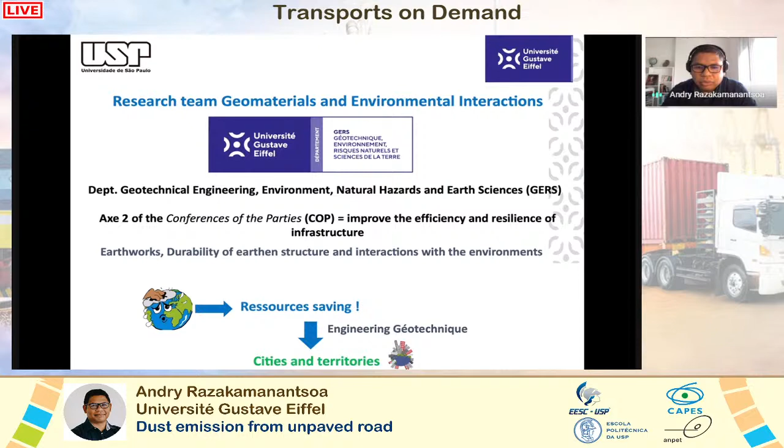So our main topics are around earthworks, durability of earthen structures, and the interaction with the environment. In the context of global warming, the main question that we try to solve is about resource saving by using the knowledge in engineering geotechnics around the application, which is cities and territories.

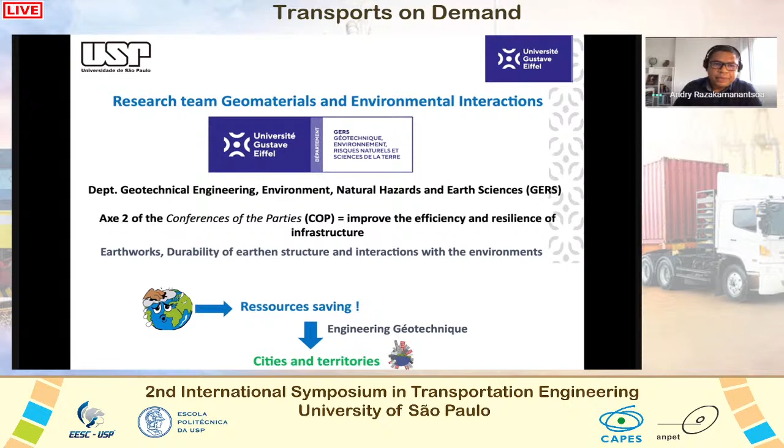The main topics of research of our laboratory are focused on interactions in geomaterials, where we try to develop new binders and to reuse materials, mineral and organic. With these aspects, we use porous media and coupled hydromechanical and chemical mechanisms as methods of study. About interactions of geomaterials with the environment, we are working mainly on geomaterials submitted to hydromechanical stress, and also interaction with the atmosphere. For that, we use multiphysics coupling, solid mechanics, and fluid mechanics.

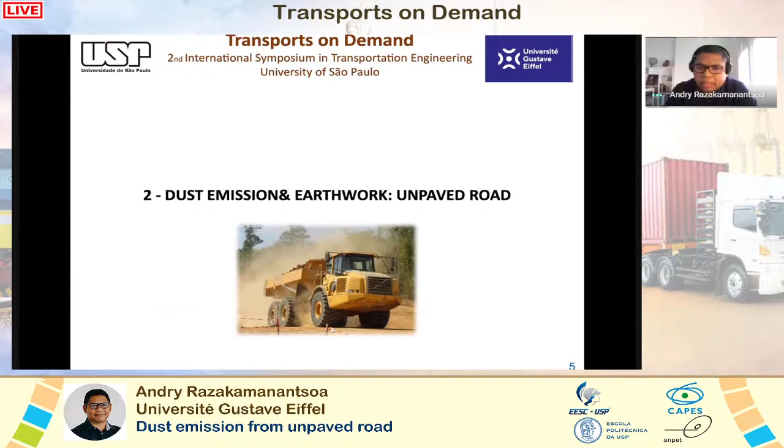Our strategy is that the studies are performed using a pluridisciplinary and multi-scale approach from molecular to field scale. And let's go back to the topic. I want to talk with you today about a part of a study that we have performed on the problematics related to dust emission. The first part of the presentation is related to the geotechnical aspects of dust emission and the link with the unpaved road.

The main context is about the need in the field. If we talk about earthwork applications, the professional activities require the use of an important volume of water for different parts of the activities. But the activity which uses the most water is dedicated to dust inhibition. Why dust inhibition? Because it can cause problems, risks to the security and safety of workers during the activities.

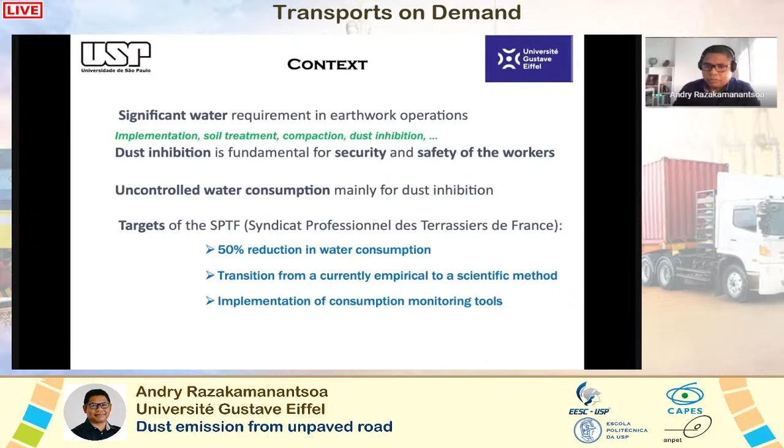But nowadays, the quantity of water that they use in the field is not controlled, and the target is to try to reduce water consumption and to use a scientific approach to develop different tools that can be provided to the profession. Many actions have been carried out by professionals in earthworks, and they are good and interesting, but not sufficient to reduce water consumption.

To give an example, it is 1 liter per cubic meter of moved soil. If we consider that we have 60 cubic meters per day for a current earthworks activity, then you can imagine the quantity of water that they consume. But this is an example.

But for now, there is no tool to help the professional in earthwork activities to control the use of water. So the problem is about dust inhibition. So I would like to talk a little bit about the state of the art related to dust, because if we take into account the geotechnical definition, we don't have dust, but we can consider fine particles less than 80 micrometers that can be collected from the surface of soil.

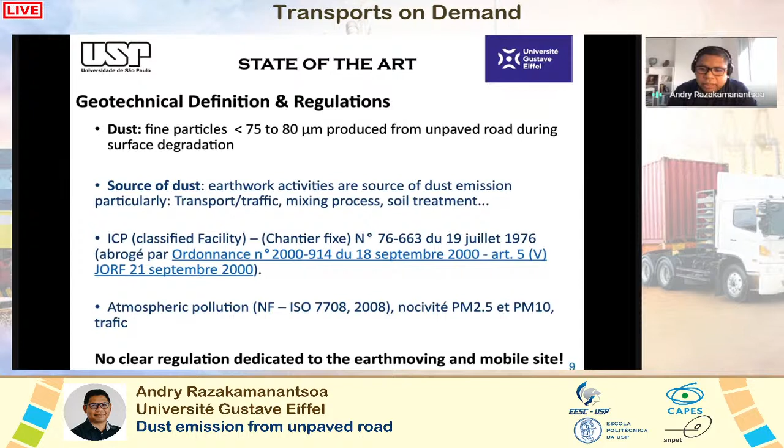So if we can consider that this is dust, this can be produced during transport, traffic, mixing process, or soil treatment. In terms of regulation, in France, many regulations are dedicated to sites like quarries, but it's not very clear for earth moving and mobile sites in terms of exposure.

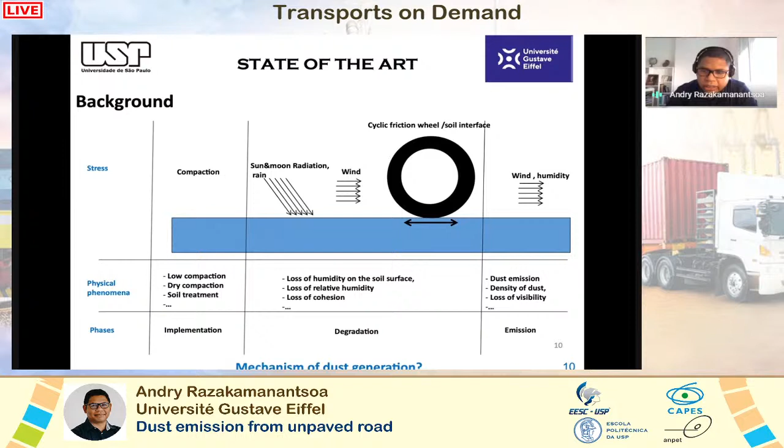If I make a kind of background about dust emission and try to identify the main sources of dust production, we can see that we can have dust from compaction, or during a cycle of traffic, or also due to environmental conditions like wind and things related to that. But from the current knowledge, the mechanism of dust generation is not well clarified.

Okay, how to inhibit dust emission? For now, there are many techniques, but we can summarize them in 3 points: mechanical stabilization, the second one is the use of additives like binder or other chemicals, and the third one is the use of water. But the use of binder is not recommended because it's not environmentally friendly.

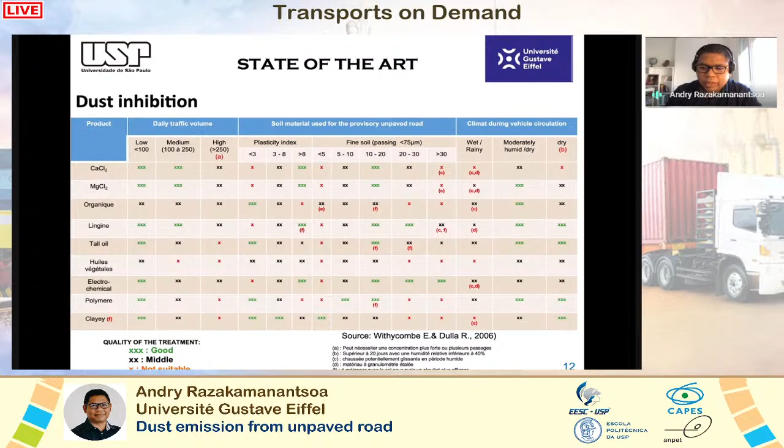So the cheaper one is water, but regarding the target to reduce water consumption and protect water resources, it becomes a problem. So let's talk about the scientific gap. Many scientific and technological gaps can be cited, but regarding dust emission, we have selected 3 points.

The first one is regarding the reproduction of the mechanical stress governing dust generation at laboratory scale. After that, what about the dust initiation conditions subjected to environmental parameters? And the last one is the consideration of dust emission, which will be the topic of Michael later.

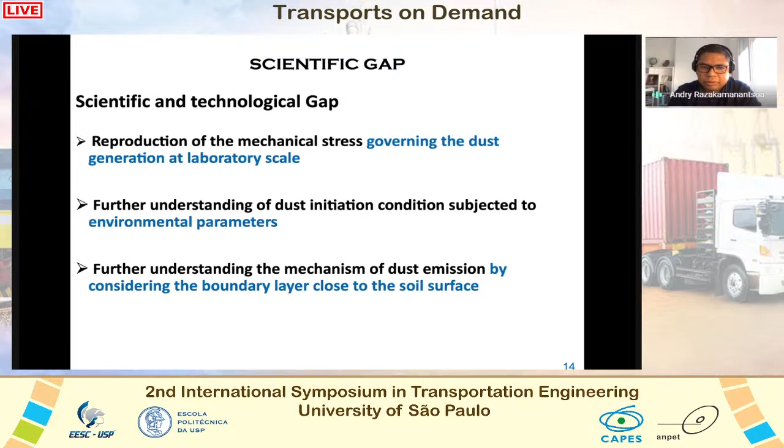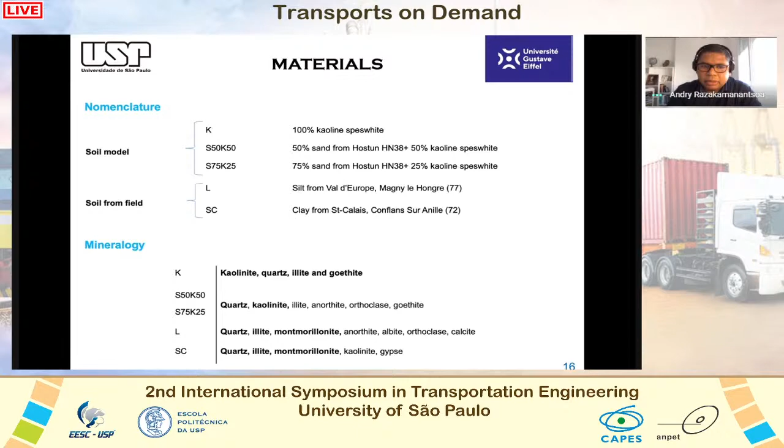To perform this study, we have selected different types of materials. We have a model soil, and we also have soil from the field. We have the mineralogy. We have selected these materials to have a fine soil like a clay, but it's not swelling. These are the soil classifications, considering the GTR classification in France or ASTM. So we have a fine soil with low plasticity, a soil with a high potential of dust emission.

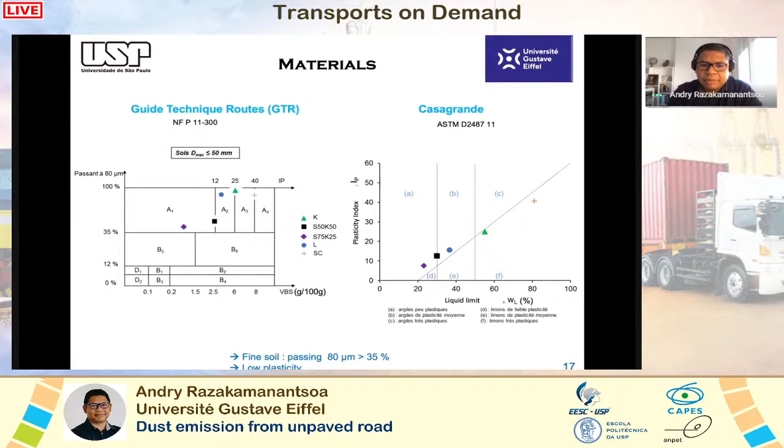The first point that we try to highlight is the source of dust generation. For that, we want to investigate a little bit the influence of stress tensor rotation provided by the roller compactor that we can encounter in the field. From that, we will see how it is possible to apply and develop this kind of compaction at laboratory scale, and to compare it with the conventional one that we used to have in the lab.

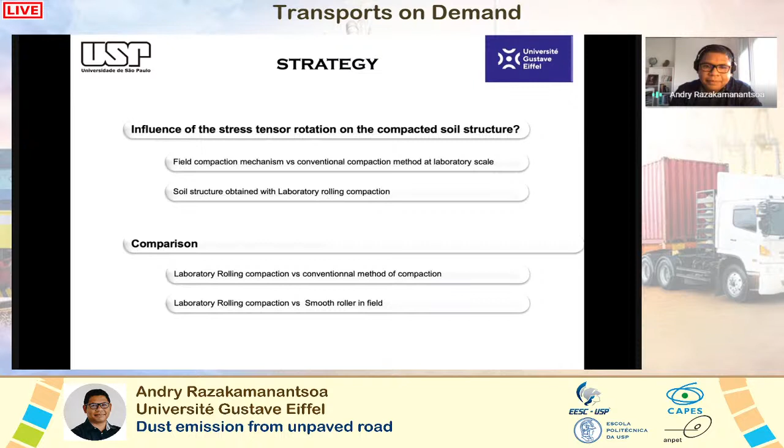As I said, when you consider a smooth roller compactor, for example, it applies a stress tensor rotation during compaction, and this enhances the settlement of the soil, and you have compaction at the end. This stress tensor rotation is not easy to perform in the lab, because the conventional laboratory compaction that you have actually is either dynamic or static uniaxial compression.

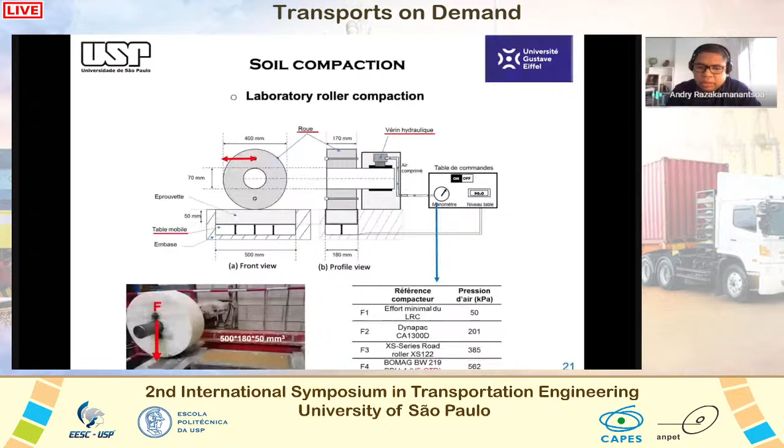So the first question is how to reproduce this method, in order to understand further the soil structure provided by this kind of compaction. So we developed a new method for our application, and we applied different levels of effort which correspond to the standard smooth roller that we can encounter in the field.

As a result, regarding the soil structure, the laboratory rolling compactor provides a similar level of dry unit weight as the standard Proctor, but the difference occurs in terms of pore size distribution: when we increase the compaction effort, the roller compaction decreases the macropore size around 10 micrometers. And obviously, the volume of mercury that can be absorbed decreases.

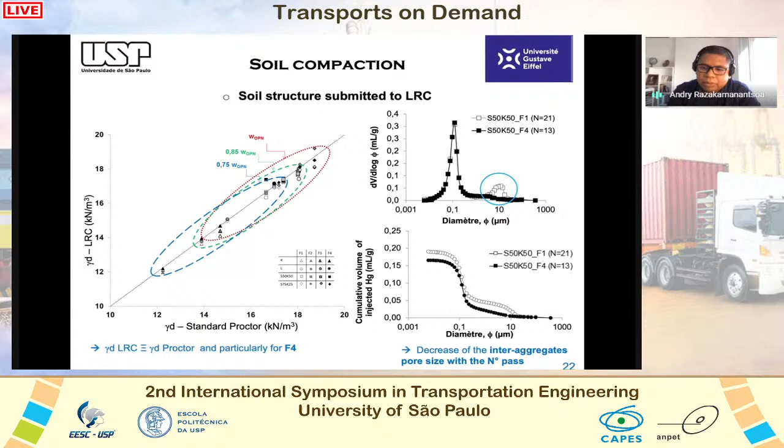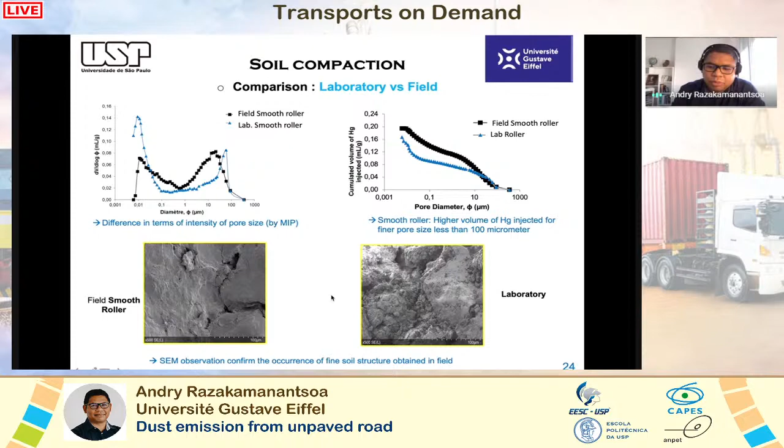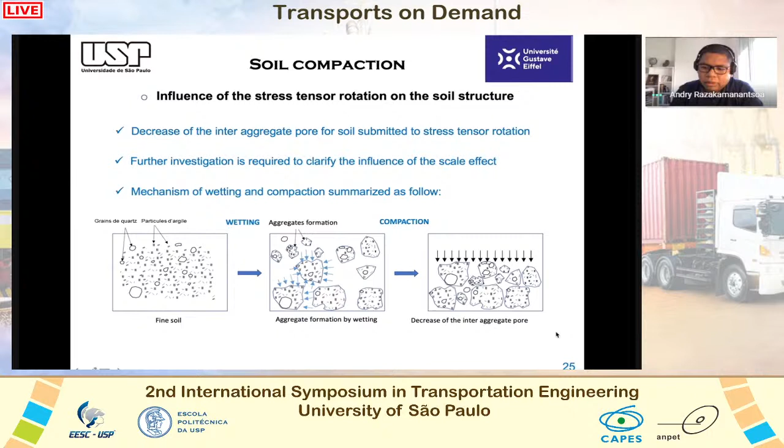If we summarize what we have obtained as information about the compaction, all types of compaction reduce interaggregate pores of the soil submitted to stress tensor rotation. And another important information is that the aggregate formation is obtained during wetting, and compaction allows only to decrease the macropore size without touching the micropore size, which is inside the aggregate.

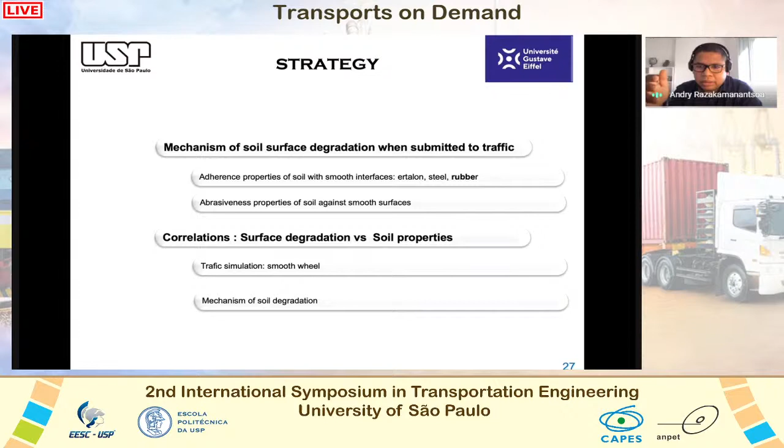The next step: since we understand more about the compaction, let's talk about the interaction between the compacted soil and the wheel during a traffic simulation. We will talk a little bit about the adherence and the abrasiveness properties of soil against different types of interfaces, mainly rubber, because when we talk about traffic, the soil is in permanent contact with rubber during the traffic cycle. And after, we will try to see if we can make a correlation between surface degradation and soil properties.

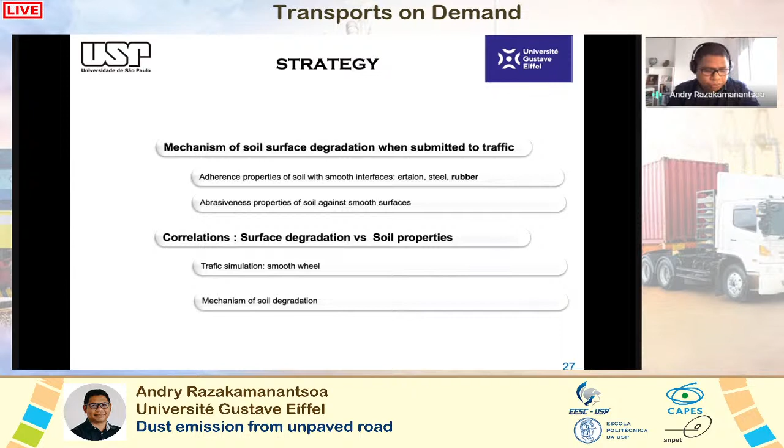About the adherence and the abrasiveness: for that, we did a unidirectional shear box test, and we changed the interfaces. The first model is to use soil and soil interfaces, to obviously have a cohesion and a friction angle. After, we changed the interface and put rubber, steel, and Ertalon to have different types of interfaces.

In terms of adherence, you have the ratio between the cohesion with interfaces and the cohesion with soil. If you have a ratio of more than 1, that means that the adherence is more important. As you see, with this type of soil, we have an adherence which is higher. Looking at the type of soil, the more we increase the sand content, the higher the adherence. It's obvious.

And in terms of abrasiveness, what you see is that all of the soils have an abrasiveness level which is close to 1. That means that all configurations tested can be degraded more or less in contact with rubber.

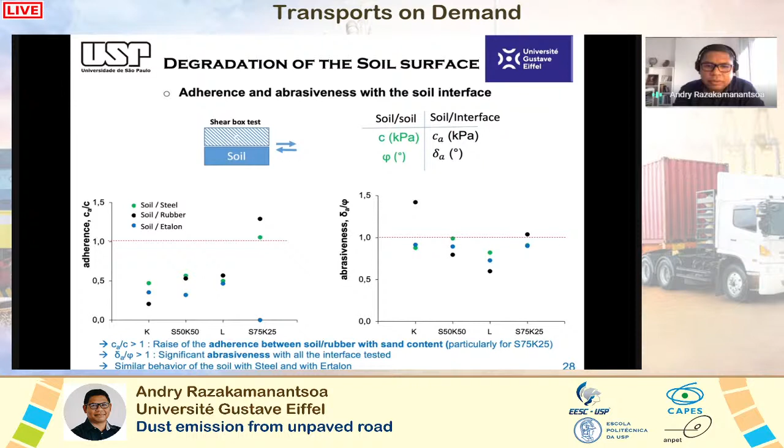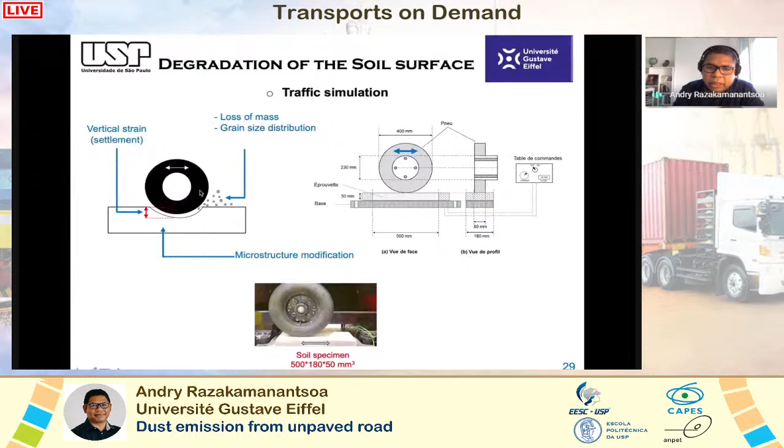After that, we tried to simulate cycles of traffic at laboratory scale. We compacted parallelepipedic specimens and applied different cycles with a smooth wheel. We measured settlement, collected the particles resulting from traffic, and did grain size distribution and SEM observation.

From SEM observation, the grains collected after a cycle of traffic are mainly composed of aggregates. And if we apply different series of traffic cycles, we observe that at the beginning we have a very important aggregate size, and this size decreases as the number of traffic cycles increases. That means that the abrasion between the rubber of the wheel and the soil increases with the number of cycles. We developed for that a degradation index.

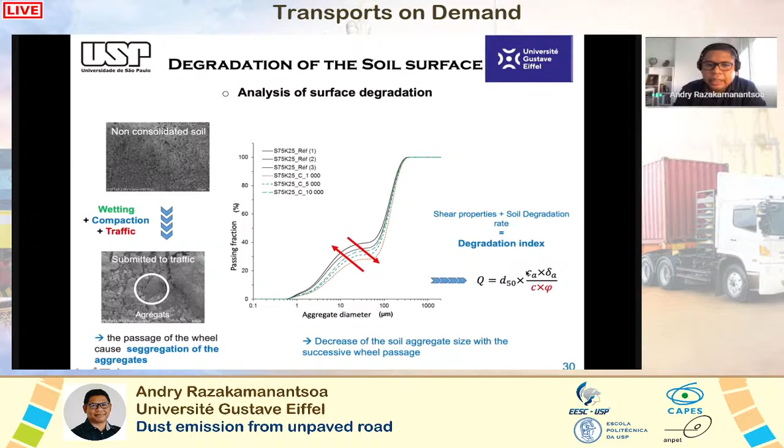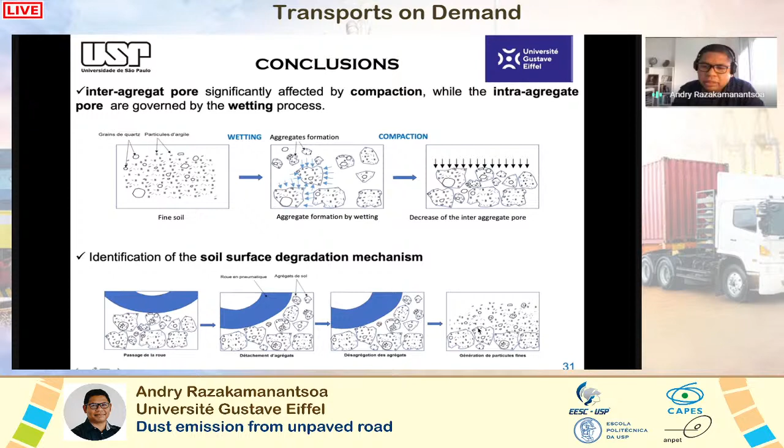As a conclusion, regarding the compaction, wetting allowed to create the aggregates, and compaction allowed to diminish the space between aggregates without touching the micropores inside the aggregate. Regarding the soil surface degradation mechanism, at the beginning you segregate the surface of the soil, you take out the aggregates, and with time the aggregate size decreases until we have fine particles. So this is the first step of the study.

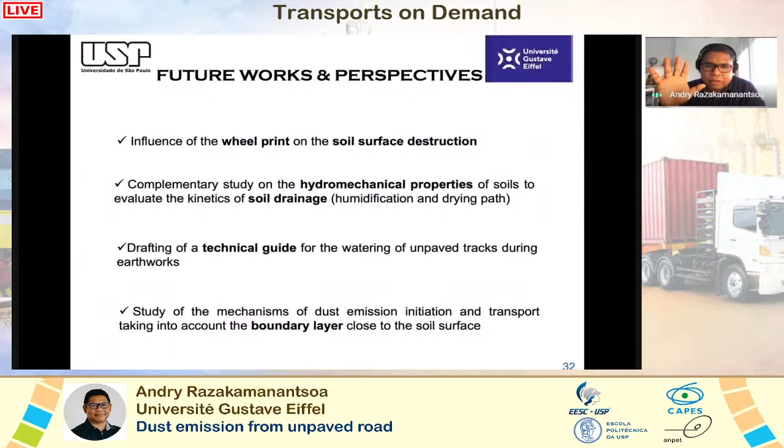What we have concluded: first, we have to investigate more the influence of the wheel print on soil surface destruction, and then take into account hydromechanical properties related to soil drainage during wetting and drying paths. And from now, we are also trying to draft a technical guide regarding the implementation and the soil degradation to help professionals in terms of water saving.

So in the overall view, the following steps of the study are to try to take into account the problem of health, which is linked to PM, particulate matter emission, and to try to prevent some health problems related to dust emission.

So this project has been running since 2012 until now. We have had 2 PhD students and several masters. We have international patents and scientific papers and a guide in preparation.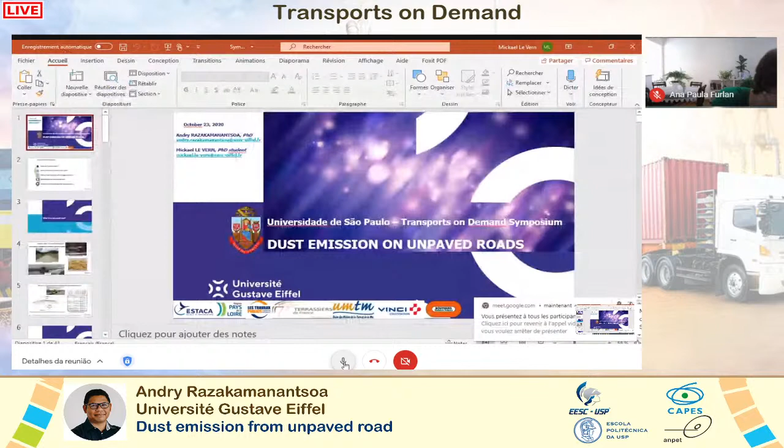So hi everybody, I'm Mickael Le Vern. I am a PhD student working with Andry Razakamanantsoa, and I will present to you the atmosphere and soil interface, the interaction. First of all, I will broaden the topic of unpaved roads, and after that, I will focus on our recent research undertaken in our lab on the problem. So I will speak about dust, and I will give an overview of unpaved roads in the world.

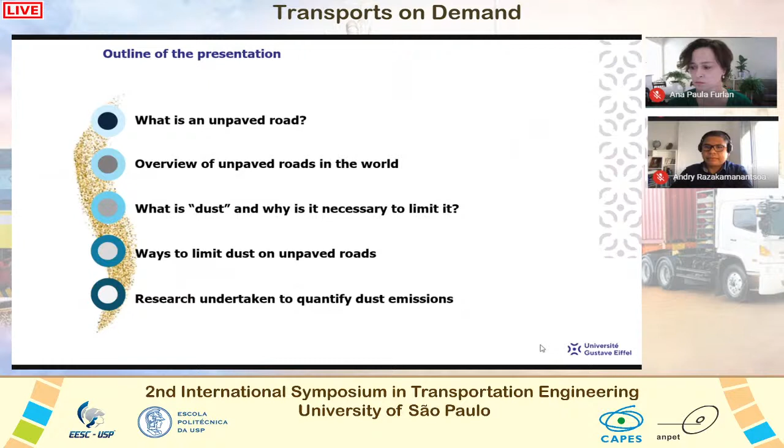So what is an unpaved road? Andry spoke about that. An unpaved road is a road with no surface coating layer. There is no asphalt, no bituminous material on the surface. So the vehicles circulate on the aggregates. These roads are not paved for economic or practical reasons. For economics, for example, low volume roads: there are not enough vehicles circulating on the surface to make it viable to put a bituminous layer on the surface. And for practical reasons, for example, in mines or in construction sites, because these roads are temporary. So we do not put asphalt layers on temporary roads.

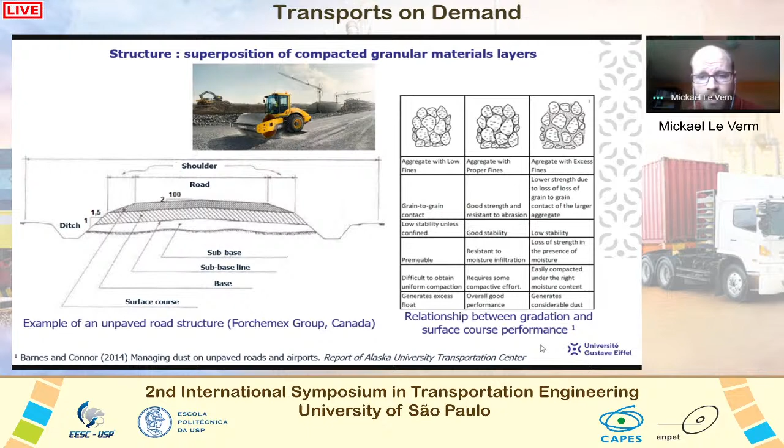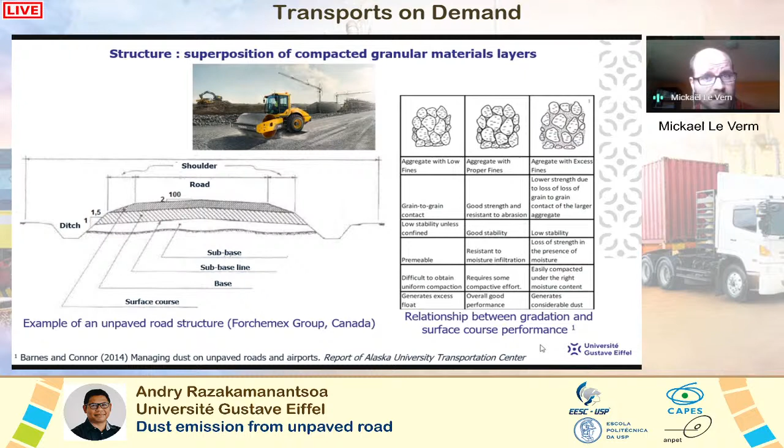So what is an unpaved road? It's a superposition of compacted granular material layers, and vehicles circulate on the surface course. The surface course is made of a mix of aggregates and fine particles. If you have too many aggregates, you cannot compact the road, so it's not good. If you have too many fines, you have a problem of stability and too much dust generated. So you have to have a good gradation of the surface course.

So here I present the 6 countries around the world with the largest road networks. First of all, the US: 37% of the roads in the US are unpaved. It's the same amount in India. In Brazil, in your country, 89% of the roads are unpaved. It's a very large amount. It's a very important topic in Brazil. And in Canada, 60% of the roads are unpaved.

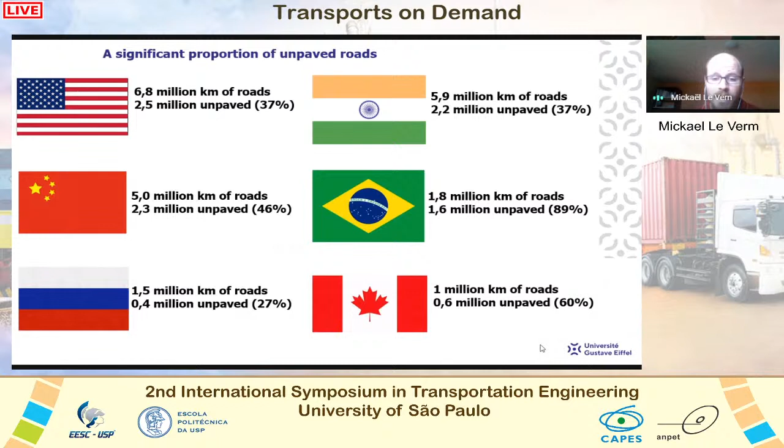So these roads generate a lot of dust. So what is dust and why is it necessary to limit it? Dust particles are the fine solid particles remaining suspended in the atmosphere that can be transported by the wind. Unpaved road emissions are in the range of fugitive dust, which are coarse particles. Coarse particles are between 2.5 and 10 micrometers. We can see on the right the comparison of the size of the particle with a human hair. A human hair is almost 50 to 70 micrometers in diameter.

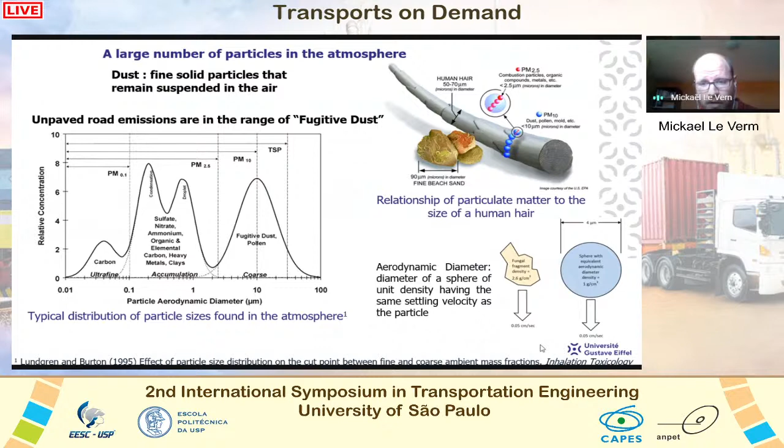And we can see the particle of 10 micrometers, the blue one, and the 2.5 micrometer, the red one, very fine particles. And we are taking into account not the real diameter of the particle, but the aerodynamic diameter. You can see here a definition. Aerodynamic diameter is the diameter of a sphere of unit density having the same settling velocity as the particle. So that's what, in the literature, we are considering.

So where do suspended particles come from? They come from many, many areas, but particularly combustion: the combustion of wood, the combustion of oil in engines, exhaust of diesel engines, and also dust on the roads, on unpaved roads, and dust on construction areas, which are mainly, you can see here, coarse particles, between 2.5 and 10 micrometers or above 10 micrometers.

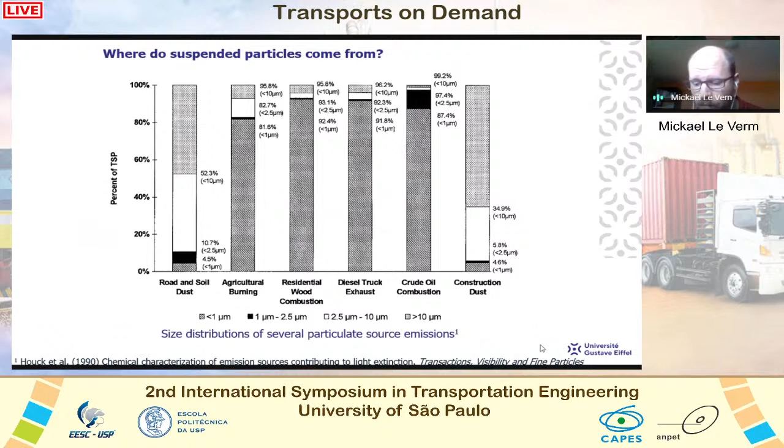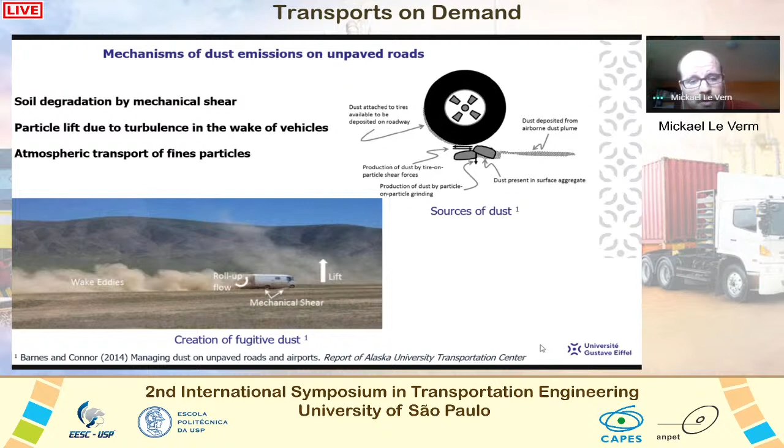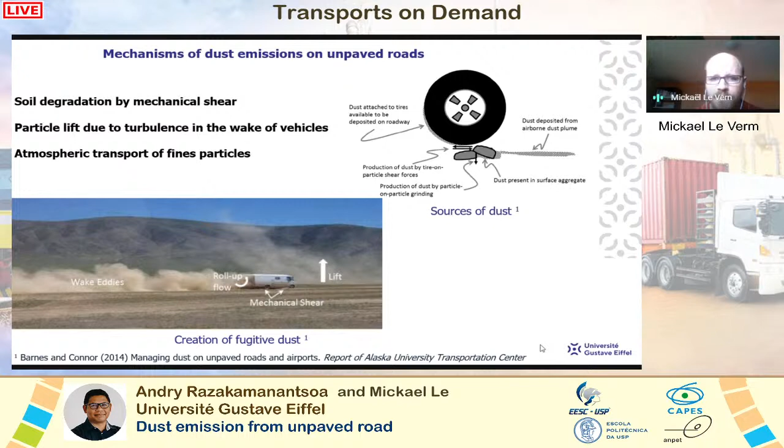And what are the mechanisms of dust emission on unpaved roads? Andry spoke about it. It's soil degradation by mechanical shear at the tire-surface interface. The particles are lifted due to the mechanical shear, but also due to the turbulence in the wake of vehicles, the eddies generated by the vehicles circulating on the road. And particles are transported by atmospheric turbulence, by the wind.

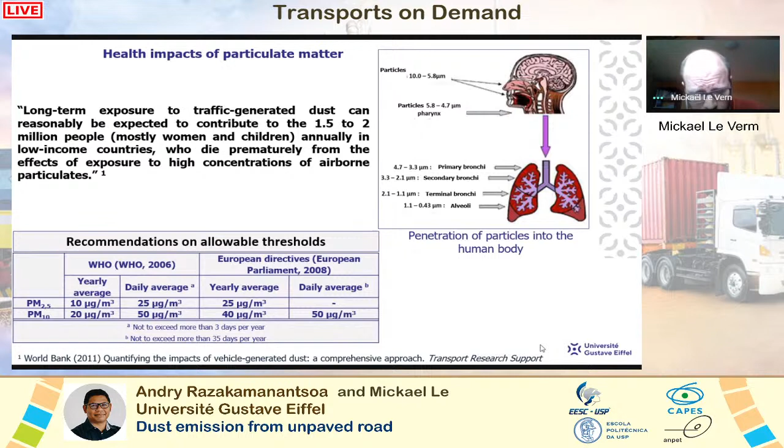So here you can see a quotation from a report of the World Bank in 2011 about the dust emission of unpaved roads, saying that between 1.5 and 2 million people die prematurely in the world every year because of high concentrations of airborne particulates. So it's very important. And that's why, you can see in the table, the World Health Organization and some parliaments, for example for us in France, the European Parliament, have some recommendations of allowable thresholds of particles in the atmosphere. You can see it's around tens of micrograms per cubic meter of particles not to be exceeded in the atmosphere.

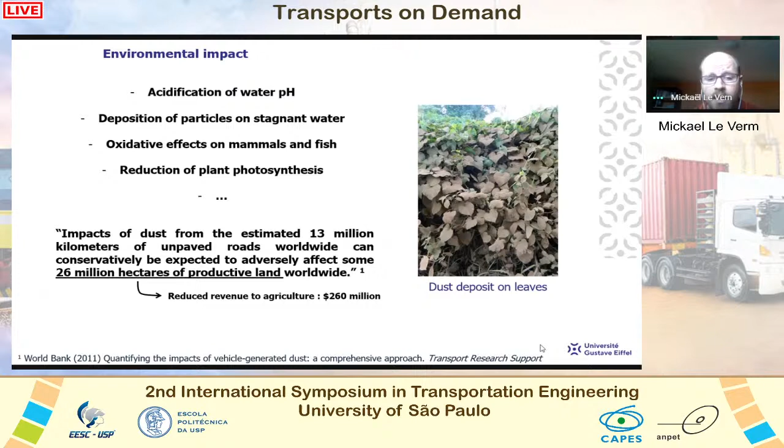Particulate matter also has environmental impacts. Dust, when it deposits, can deposit on leaves and reduce plant photosynthesis. It's a problem for agriculture. Here again, a quotation: 26 million hectares of productive lands worldwide are affected by particulate emission, and it reduces the revenue of agriculture, so it's a problem.

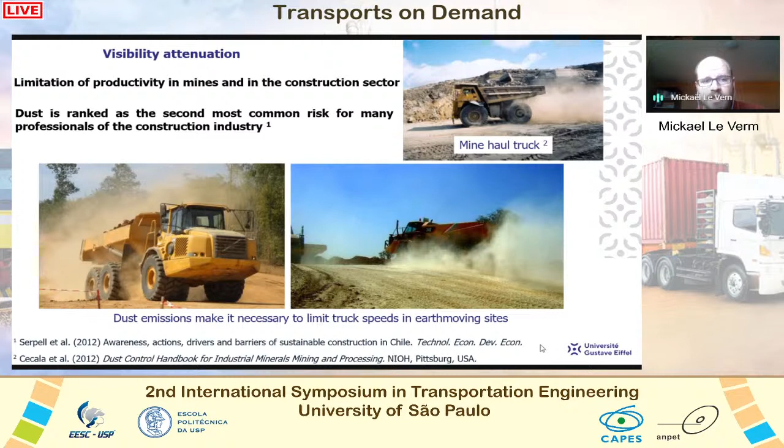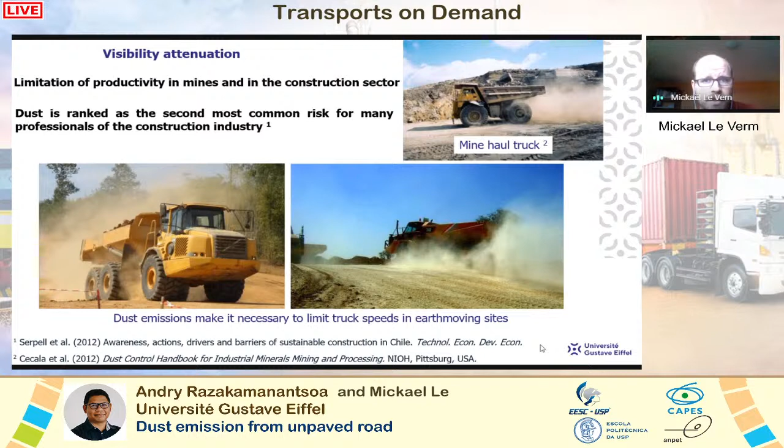So what are the means at our disposal to limit the dust on unpaved roads? First of all, we can have a good gradation of the surface course, a good mix between big particles and small particles, aggregates and fine particles, and grade the surface with, for example, a motor grader. It's very important to pass very often with a motor grader.

We can also use, Andry spoke about it, chemical suppression. You can use some salts, some resin, some bituminous material to apply on the surface. It's effective, but it's very expensive and it's not good for the environment. So it's not a very good solution.

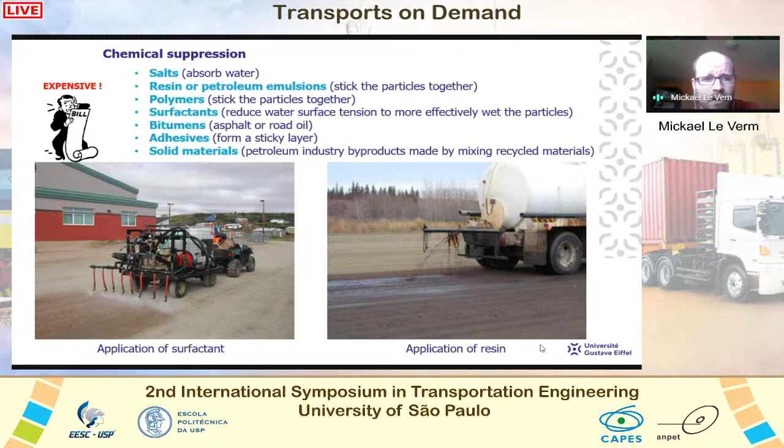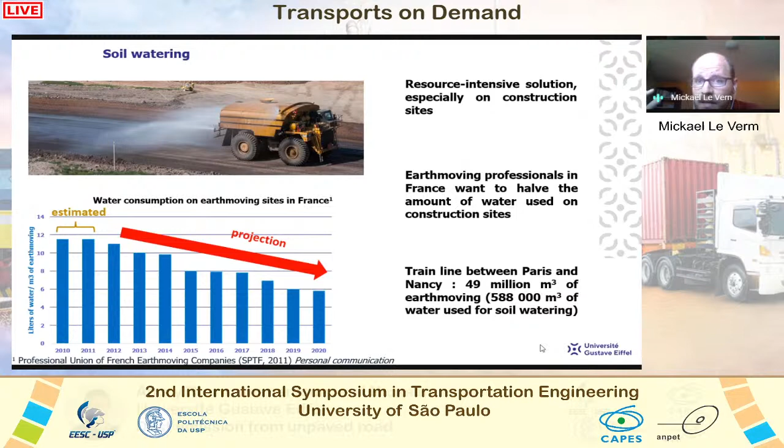They want to halve the amount of water used on construction sites. Andry spoke about it: the amount of water was around 12 liters per cubic meter of earth moving. Earth moving sites are quantified in volume, the volume of material moved.

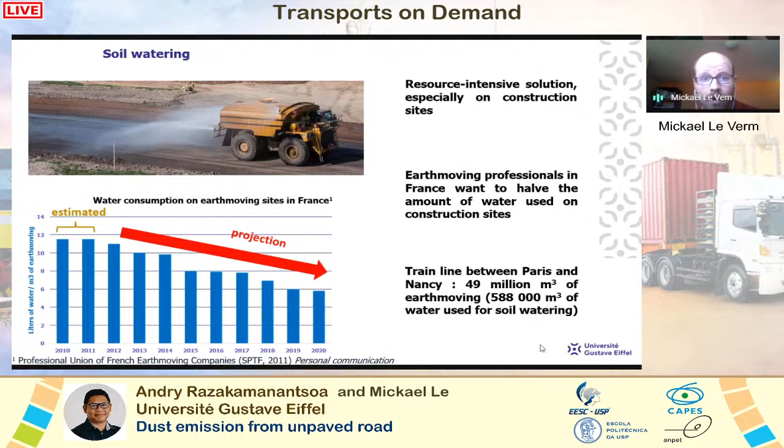For example, one order of magnitude: one earthwork project, a train line between two cities in France, Paris and Nancy, involved around 49 million cubic meters of earth moving, and it represented 588,000 cubic meters of water applied on the soil to limit dust. So it's a large amount of water.

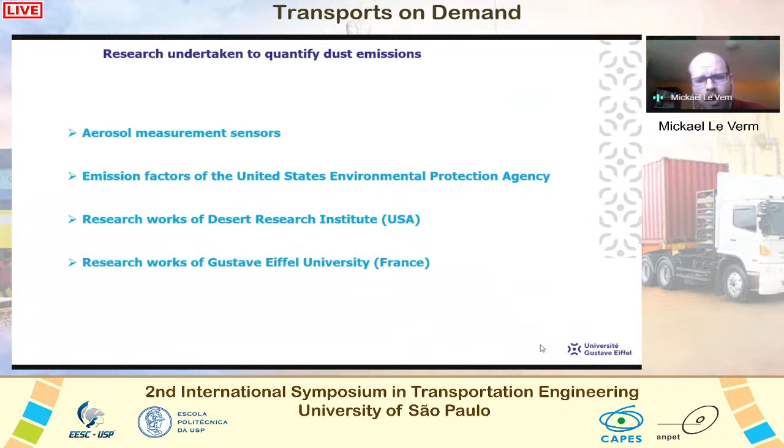Dust emission and water use are problematic, so we need to undertake research on this problem. Here I will present the device, the apparatus at our disposal to study dust emission. Then I will present the state of the art, the emission factors of the US Environmental Protection Agency. They are very commonly used worldwide, but they have limitations, so further research is needed. I will present the research work of the Desert Research Institute in the US, and the work we are undertaking at Université Gustave Eiffel.

The first and most commonly used apparatus to measure dust emission is the high volume sampler. It's a pump: you suck in the air with particles. The particles come through the apparatus, and we need to select the size of particle we want to measure. We can do that with a cascade impactor or a cyclone.

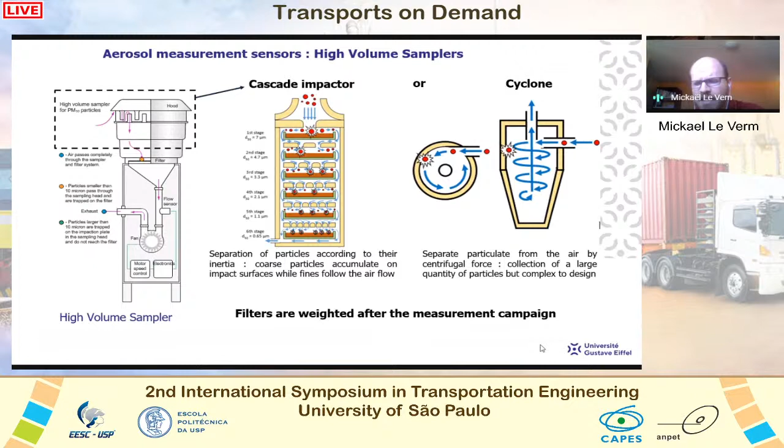With a cascade impactor, you separate particles according to their inertia, and select the ones you want to measure. With a cyclone it's the same, but using centrifugal force. You select the particle you want to measure and collect it on a filter. Afterward, the filters are weighed after the measurement campaign, giving an estimation of dust emission over a long period of time. But these measurements are not real-time.

For real-time measurement, we use apparatus called spectrometers. The air is sucked into the apparatus with a pump, and the particles come into a measuring chamber where they pass through an electromagnetic wave, typically a laser beam. When a particle passes through the laser, there is a scattering of light, and we measure the scattering angle, which is related to the particle diameter.

So we can estimate the size of the particle, and by estimating their density, we can measure their mass and estimate in real time the concentration of particles being raised into suspension, in micrograms per cubic meter. All of these apparatus are used worldwide, particularly in the US, to establish national ambient air quality standards.

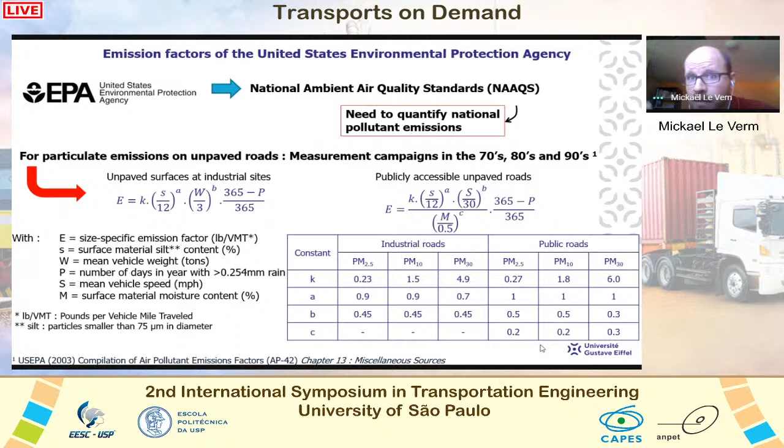For these standards, there is a need to quantify national pollutant emissions, particularly dust emission. So for particulate emissions on unpaved roads, in the US they did measurement campaigns in the 70s, 80s, and 90s, and established two formulas: one to assess emissions on unpaved surfaces at industrial sites, and one for publicly accessible unpaved roads.

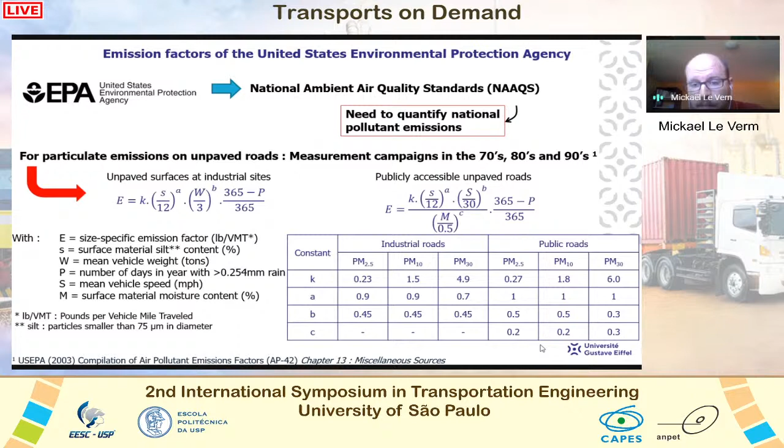These formulas are purely empirical, with many factors depending on the type of particle and the type of road. They're very commonly used worldwide, state of the art, but purely empirical. There are many limitations with these factors; they cannot be generalized around the world.

For example, the dust quantified in these emissions represents horizontal flux with suspended particles, but not entrained particles, because there's a difference: big particles settle and are not entrained into the atmosphere. It's important to take that into account. Also, the emission factors for industrial sites come from surface coal mining measurements, which aren't applicable to our field of research, environmental earth-moving sites. So there is a need for further research.

And in the early years of the 21st century, the Desert Research Institute undertook a lot of research on this topic.

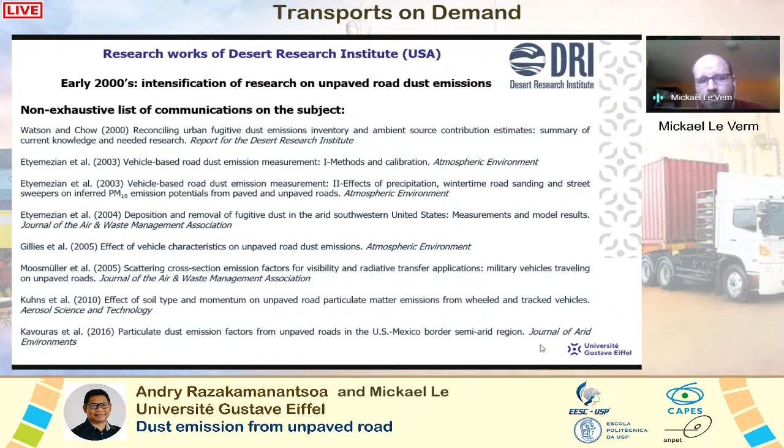Here is a non-exhaustive list of communications on the subject. If you are interested, you can read these articles - there are a very large number of them. I will just present some of the developments from the Desert Research Institute.

A DustTrak is a spectrometer. You measure in real time the dust emission, and you can get an estimation of the dust emission flux.

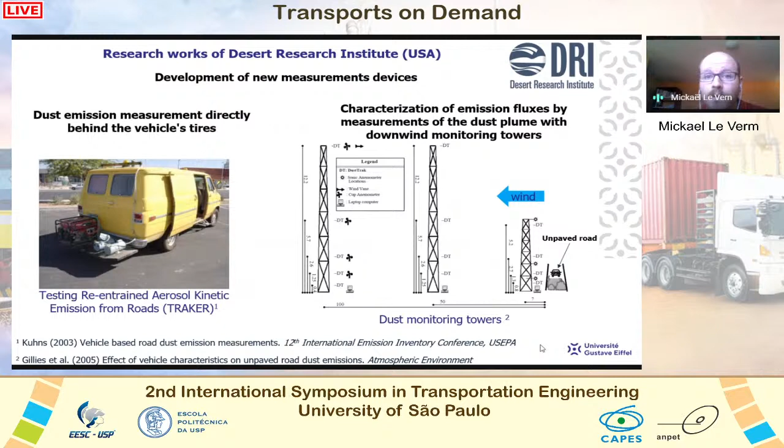So what are the main findings of these researchers? First of all, they found that dust emission directly behind the tires is related to the cube of the vehicle speed. So when you double the vehicle speed, you do not double the dust emission - you multiply it by 8. Very important to know that.

Also, dust emission flux is linearly dependent on vehicle momentum - the speed times the weight of the vehicle. And it's also seasonally dependent, so it's important to take into account the meteorological conditions.

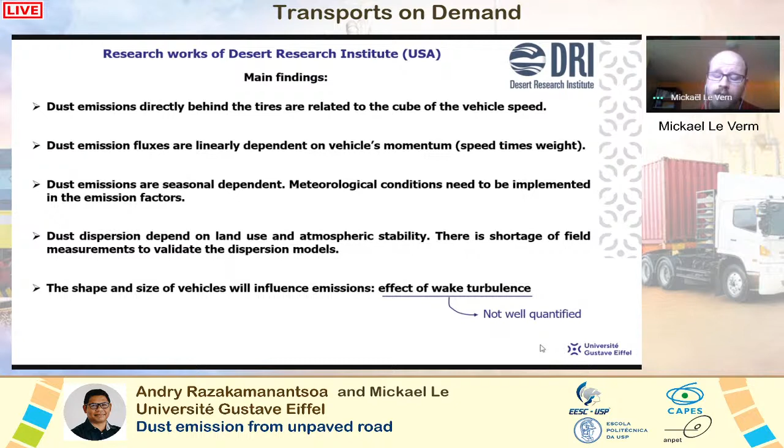We try to take that into account in our lab. There is also a lack of knowledge about dust dispersion, so there's a need for further research in this area, including the issues of wake turbulence - the dust emissions and dust dispersion caused by the flow generated in the wake of the circulating vehicle. This is not well quantified at the moment.

That's why we at Université Gustave Eiffel are working on this topic. Andry already presented the Université Gustave Eiffel, so I will be quick here. We have 3 main research areas in our lab.

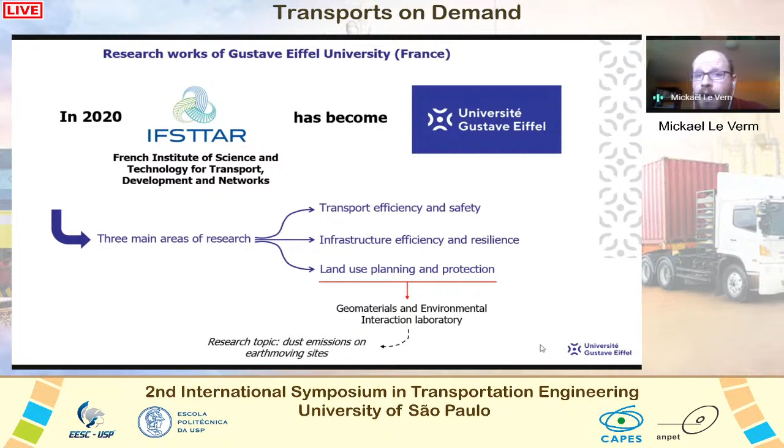We work on land use planning and protection, particularly in the research topic of dust emission on earth-moving sites, which Andry presented. What is the problem? There is a lot of dust emission from truck circulation on unpaved roads, requiring intensive watering to limit dust emission.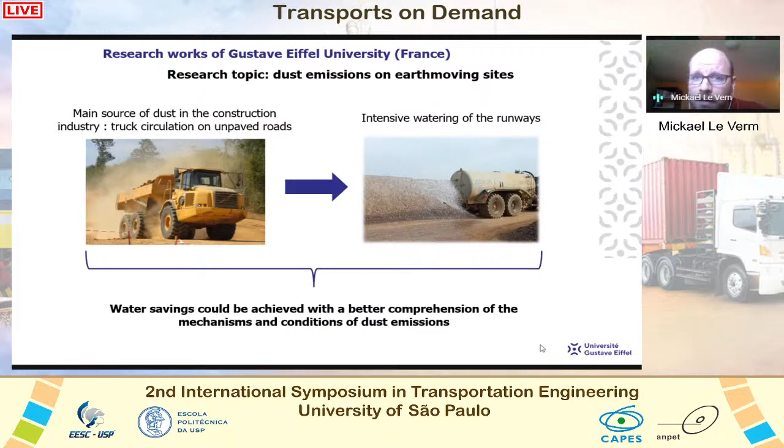We think that water savings could be achieved with better knowledge and comprehension of the mechanisms and conditions of dust emission. That's why we are undertaking this research. We are studying the dust emission mechanism from soil compaction, as we mentioned, and its relation to watering of the soil.

We work first at the laboratory scale. We compact soil samples in the laboratory with a roller compactor to reproduce field conditions of soil compaction on unpaved roads.

In the second step, we degrade the soil using a wheel in a traffic simulator, and we're interested in the accumulation of particles on the soil surface. In the third part, we study the lift of particles due to mechanical shear and aerodynamic forces, typically the turbulence in the wake of trucks circulating on unpaved roads.

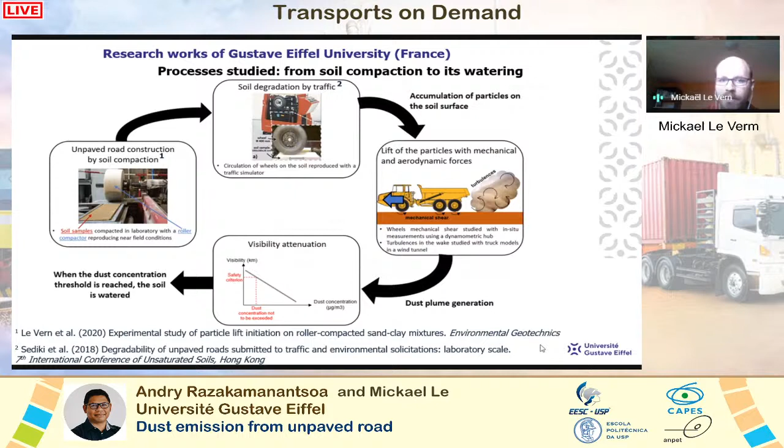This generates a dust plume, which causes visibility attenuation. We established a safety criterion to determine the dust concentration that should not be exceeded - that's when the soil is watered before visibility attenuation occurs.

Andry presented the device we use in our lab. We simulate a wheel's pass over compacted soil, using different types of tires. You can see the soil samples after thousands of wheel passes.

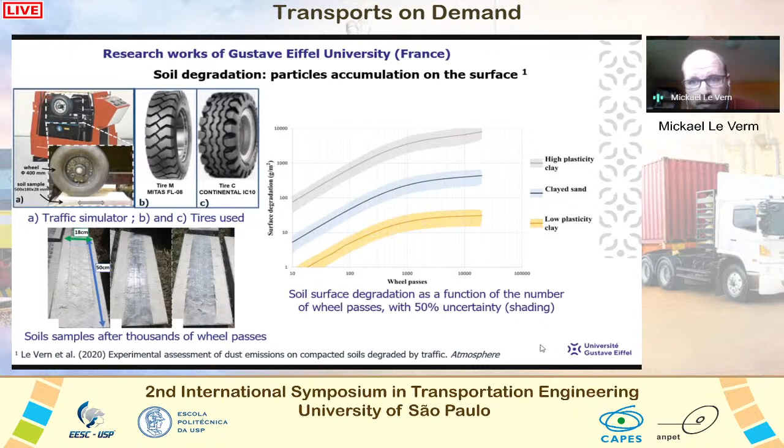We are interested in the soil surface degradation as a function of the number of wheel passes. Soil surface degradation is the mass of particles torn off by the tire per unit surface area. Here you can see the evolution of surface degradation for 3 different types of soil.

We are also interested in the grain size distribution of the particles torn off by the tire. Here you can see the grain size distribution - the blue curve is for the initial soil, a clay sand. After weighing the particles, we compact them and put them on a traffic simulator, simulating thousands of wheel passes.

After 2,000 wheel passes, we measure the grain size distribution, establishing the yellow curve. After 10,000 passes, we do the same and measure the pink curve. After 20,000 passes, we have the green curve.

So you can see we have an evolution of the grain size distribution as a function of number of wheel pass. So we established a model to model the particle crumbling. Particles are crumbled by the shear of the wheel circulating. I will not present the model, it's quite complicated. I will just present to you the results of the model.

Here you have a comparison for the grain size distribution of the result of our model, the dotted line, and the experimental curve, the full lines. We can see that the model is a good approximation of the evolution of the grain size distribution of the particle torn off by the tire.

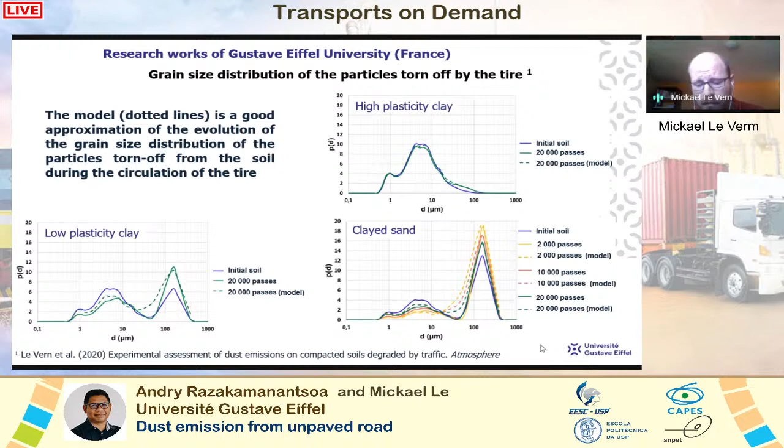So the particles accumulate onto the soil surface, and we study the lift of the particle. We work in a wind tunnel. We simulate airflow above our soils, or compacted soil degraded by the tires. And we measure, with the device on the right, the flow velocity above the soil.

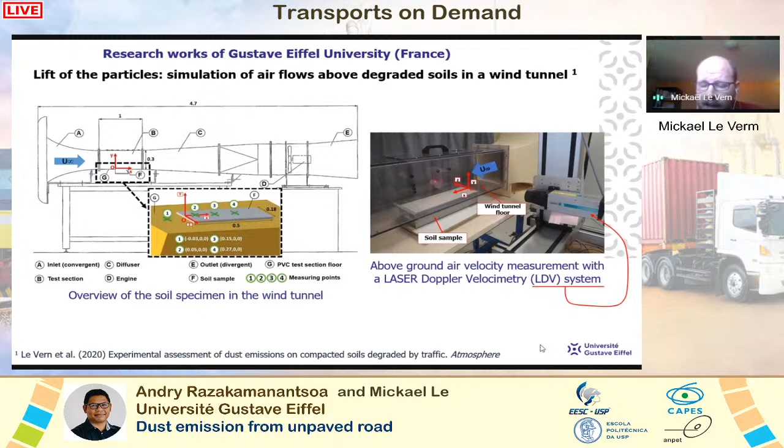And we can establish some results, some dust emission flux. It's a parameter phi, in kilograms per square meter per second. It's a dust emission flux for our 3 different soils and for 2 flow velocities, 8 meters per second and 16 meters per second, simulating the wind tunnel. And we work with 3 different numbers of wheel passes, n equal 100, 1000, or 10,000 wheel passes.

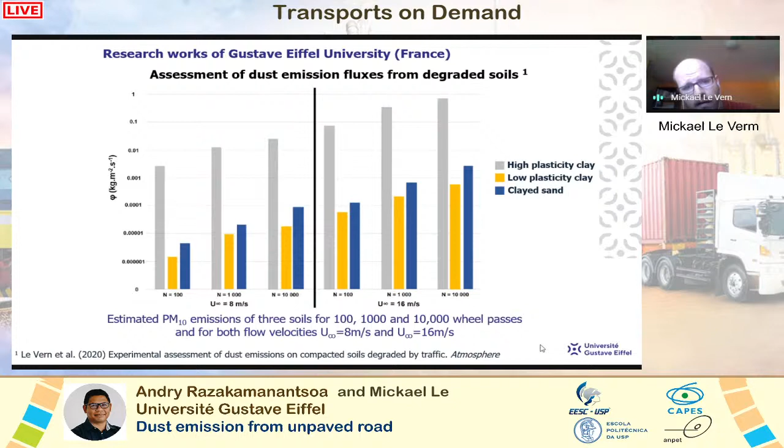What we see here, be careful, the scale is logarithmic. We can see that the high plasticity clay has dust emission many orders of magnitude above the other soils. And also, what we can see here is when we are doubling the flow velocity, we multiply the dust emission by 30. It is not a linear phenomenon.

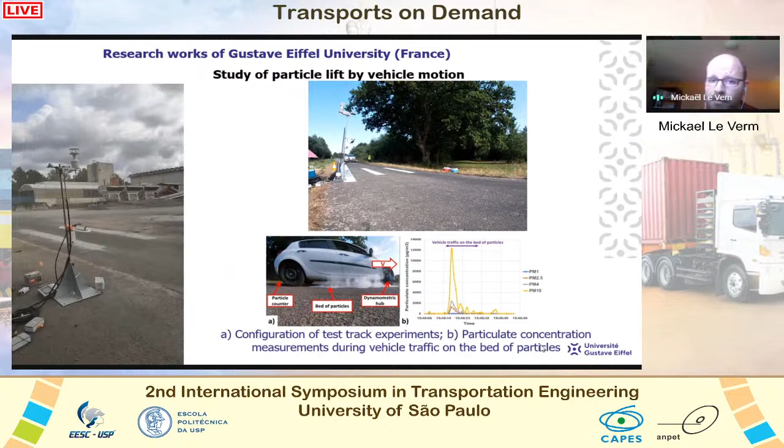So we work in the laboratory, in the wind tunnel, but we also work in test track. Here I present you some experiments we are doing. For example, we made circulations of trucks on the particles, and we are measuring environmental conditions, the dust emission, and the visibility attenuation. We do that also with passenger cars, and we measure the dust plume. That's what we are doing at Université Gustave Eiffel.

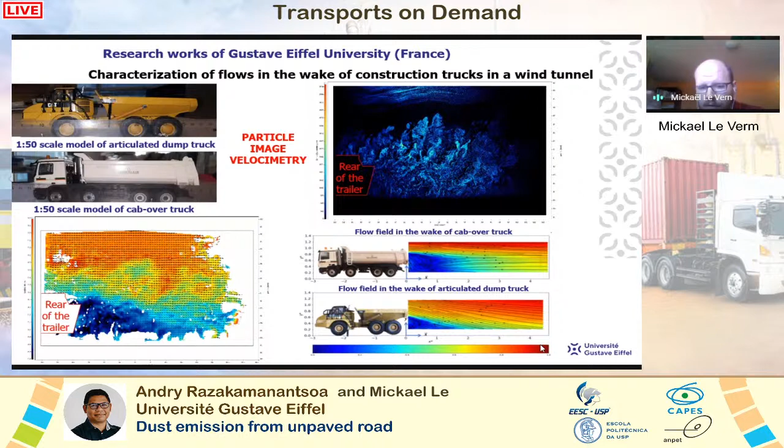So we can assess the dust emission induced by the vehicle. And you can see the average flow velocity behind the 2 trucks. It's quite different. So it's interesting to work on this topic.

And so I will conclude and provide some perspective. The problem of unpaved roads is a very huge problem in the world. Many unpaved roads exist in the world and will be constructed in the years to come, particularly in Brazil. And it's a very important topic. There are a lot of problems with unpaved roads, and among these problems, dust emission is one of the major ones because of health, environmental, and safety issues.

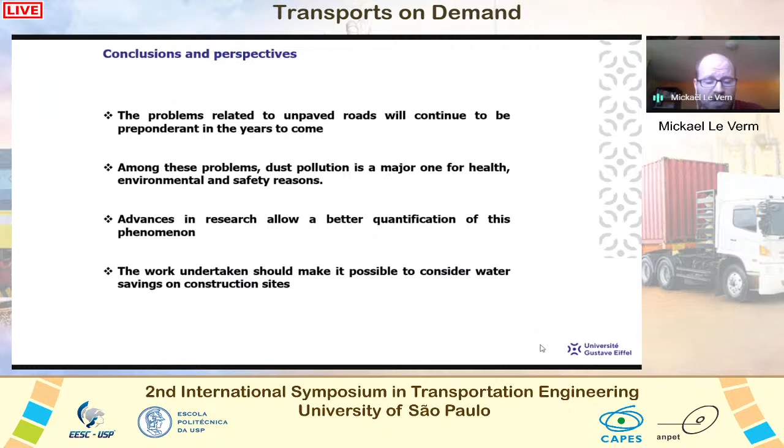So there is a need for research in this topic, and advances in research, advances in knowledge allow a better quantification of this phenomenon. At Université Gustave, we are particularly interested in research that makes it possible to consider water savings, particularly in construction sites. So I thank you for your attention, and if you have any question, we will be glad to answer it.

Okay, sorry. I'm here now. I'm back.

Thank you, guys, Andry and Mickael, for your very nice presentation. It was really impressive, and it reminds me about the essential engineering commitment with economic and social development, you know. So congratulations, Andry and Mickael.

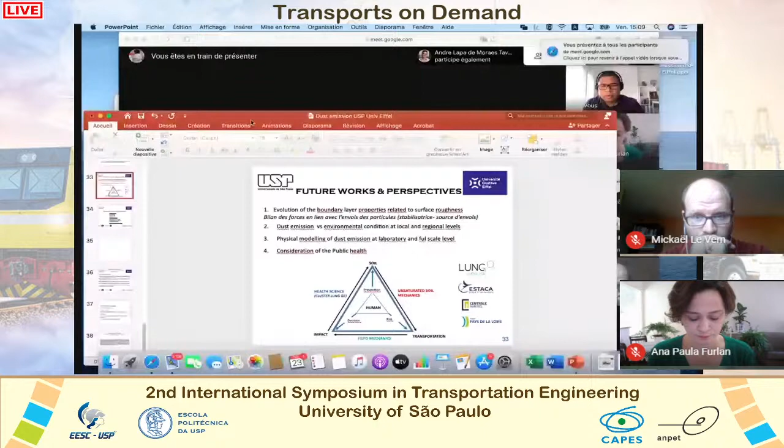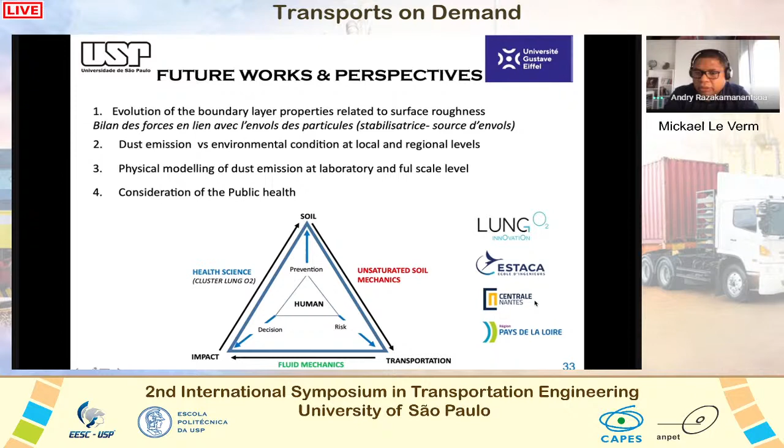To give an answer to this interesting question, our attempt now is to make a link between the dust emission and the impact on health in terms of particulate matter. And for that, we are involved in the cluster Lung O2, Lung Innovation, whose content you can check on the internet. And actually, for several months, we have been involved in an option with École Centrale Nantes regarding the link between environment and health.

And just to try to make a link, if we have a link, for example, between the particulate matter emission and the pathologic agent which can be involved in this particle. And as you know, the main and well-known problem now is related to COVID. And in these aspects, we work essentially in terms of aerosol emission, and we try to make a link between aerosol emission and the pathologic agent. I don't know if that answers the question.

I think so. To complement this question, I would like to ask you, Andry, if it's possible, could you talk a little bit more about your project Saving Water, for dust emission reduction from unpaved roads?